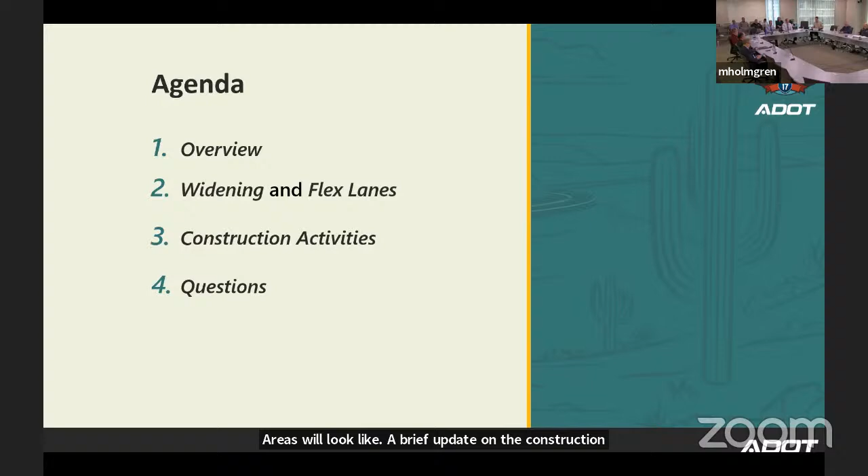So under our contracting method, this project is a design, build, operate, and maintain. We actually do have an operate and maintain component of this project. So when the construction is finished, the developer team will be operating and maintaining the flex lanes for a period of 3 years, which will give us time for training our staff on the new technology we'll be using on these flex lanes.

As far as the project owner, that will be us as ADOT. Working with us is our general engineering consultant firm, HDR, who is providing all of our construction oversight and inspection. The developer team selected for this project was the Kiewit-Fann joint venture, along with various local subconsultants and firms.

Size of this project is 23 miles, starting at Anthem Way up to the Sunset Point Rest Area. Included in that are 2 different segments: 15 miles at the southern end, from Anthem to Coldwater up at Black Canyon City, is widening with general purpose lanes, 1 new lane in each direction. The 8 miles of flex lanes will be on southbound I-17 from Sunset Point down to Black Canyon City, including 10 bridge widenings, 2 bridge replacements, and we also added 1 deck replacement on the Bumblebee northbound bridge to this contract.

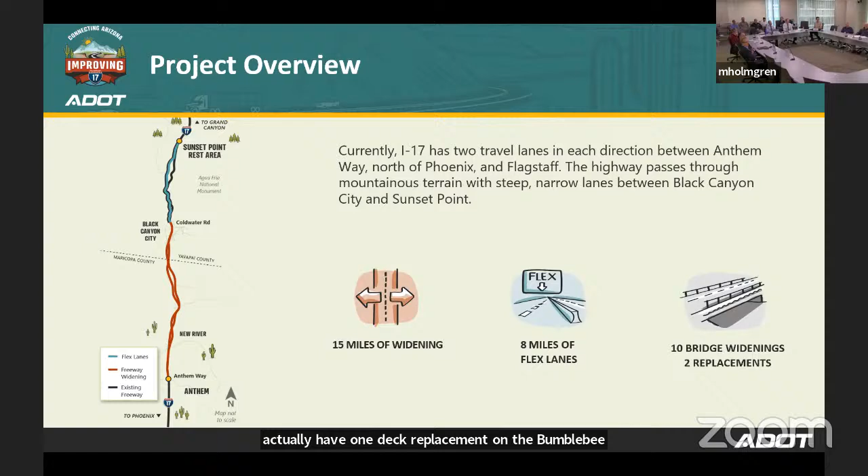Some of the benefits we're looking for: enhanced safety, of course. Everybody knows that segment between Black Canyon City and Sunset Point, especially on the northbound side on a Friday afternoon, is extremely congested with trucks going up that 6% grade. Added capacity for the future, improved traffic flow, and also supporting economic growth, because this is one of our key commerce corridors in the state.

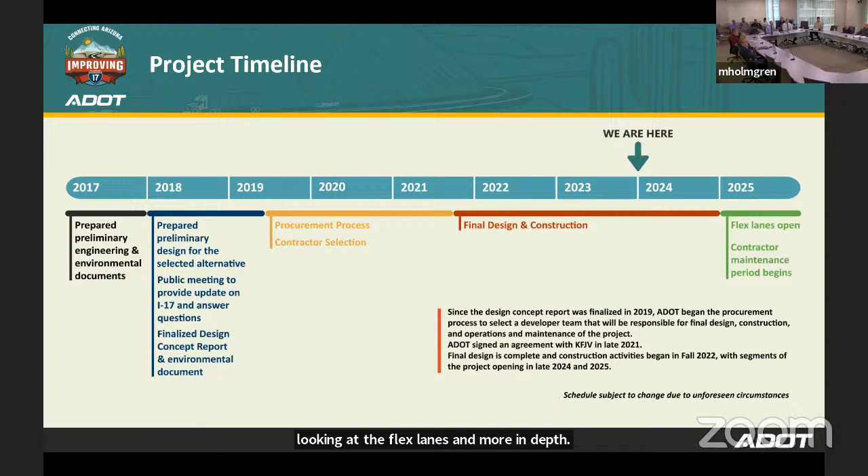Project timeline, and this one's a little condensed, because 2017 was the revised DCR after we completed the first DCR in 2015, and then came back and did a modified DCR looking at the flex lanes and more in depth on the components we were going to put into this project.

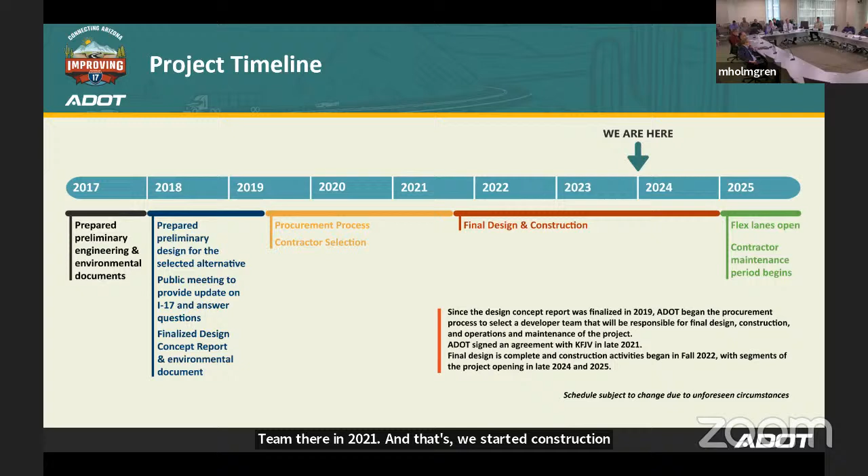So our project timeline actually started more in 2009 when we started this DCR process, and then finally to the procurement of the developer team starting in 2019. That got extended because of COVID, and then finally we were able to select our team in 2021. We started construction in 2022, a 3-year contract basically, and now we're right there at 2024, hopefully finishing up here in 2025 with this project.

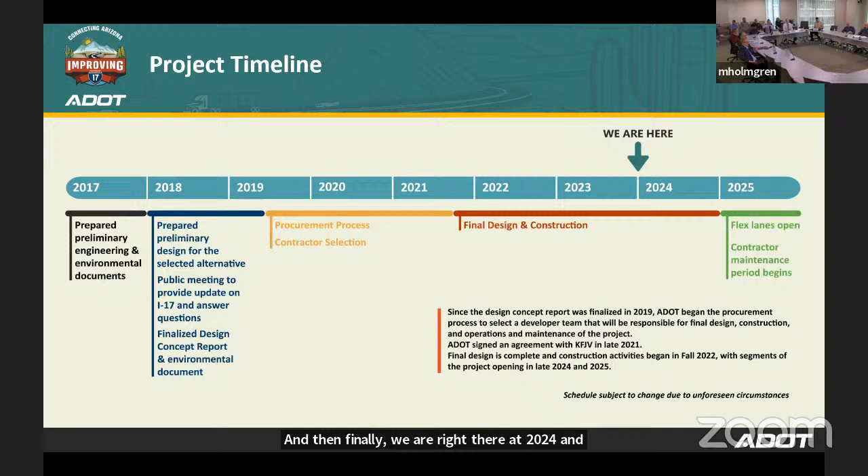So the widening between Anthem and Black Canyon City: that general purpose lane, depending on which segment we're in, may be done on the median side or the outside. Since this is a developer-driven design, they get to choose the design and how they want to proceed, balancing earthwork and other things. When it's opened up, you won't know which side we've completed on - you can tell right now going through the corridor just because of where we're making the cuts, but that will be a seamless transition once it's all final paved out.

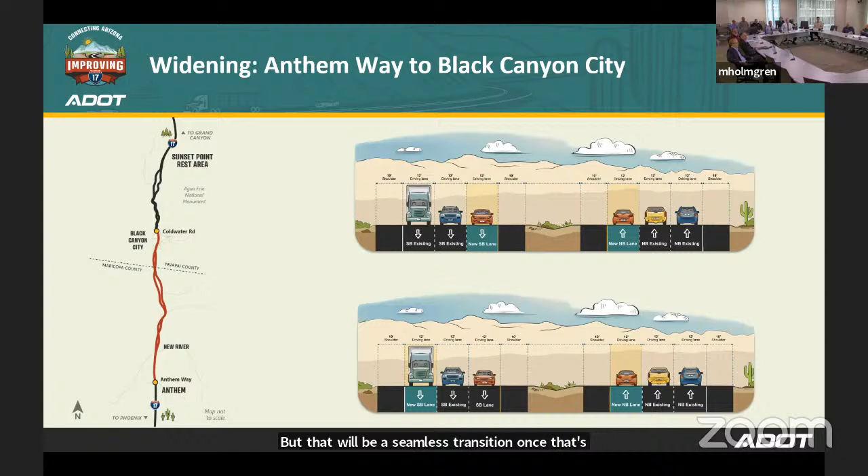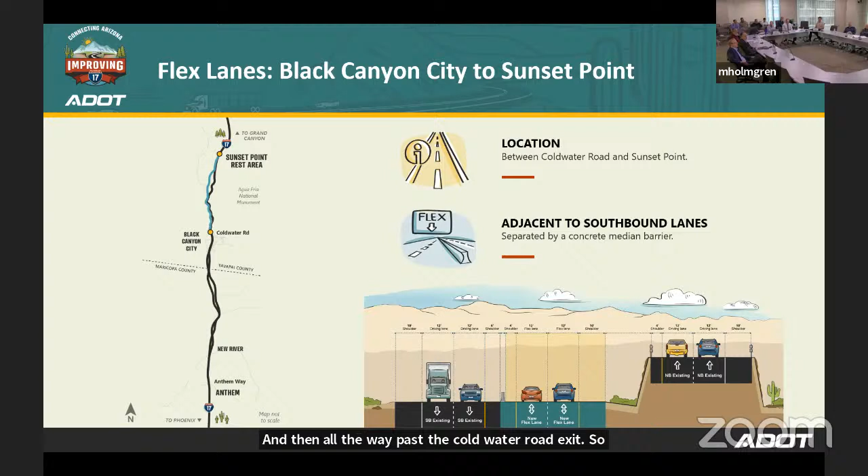As far as the flex lanes, like I said before, they are on the southbound side. We're leaving the northbound side up that hill alone for right now. Those lanes will be separated from the southbound by a concrete barrier, so these will not be just contiguous lanes where you can get in and out of them. There are no exits on those flex lanes. Once you get on them at the bottom of the hill at Black Canyon City, you will not be able to get off until you tie back in at the top of the hill at Sunset Point. Same thing coming southbound: you get on them at Sunset Point Rest Area, and then all the way past the Coldwater Road exit. So there will be no exits at Bumblebee, Coldwater, or Sunset Point for these flex lanes.

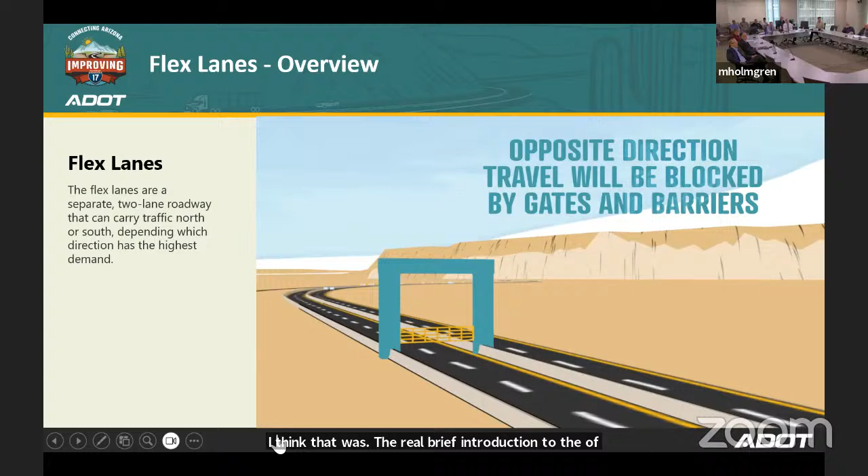I think that was the real brief introduction to how those will operate. Let's go into the crossover now.

To go into a little more detail about what those components will look like on the crossover entrances, you can see in the bottom right that photo of it. They will be a dual lane entrance into those flex lanes, two lanes with a left exit to get into them.

Up on the upper left, those will be the gates, the swing gates that will either close them off or open as the flex lanes dictate. As you approach, they progressively get longer. The first gate will be short, only over the shoulder, and they progressively get longer as they're closing, so that traffic can see them closing, and if someone shouldn't be there, they can get out of the way without hitting those gates. They also have LED flashing arrows when in operation.

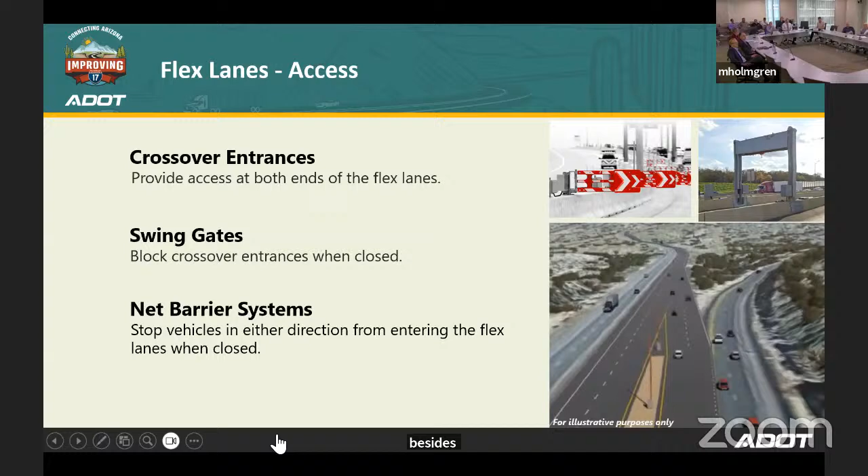That upper right picture is the net barrier, the vehicle arresting barrier. You can barely see it in the open position there. There's an actual net up at the top that drops down when closed. If anybody wrong-way gets into it, the vehicle arresting barrier will stop them. I don't believe it will fully stop a semi, but it will make a lot of noise and be very evident that you should not be in there, besides the multiple gates they'll go through before they even get to that arresting barrier.

As far as what those crossovers will look like as you're approaching, this is up at Sunset Point as you're coming southbound. There are a series of hybrid guide signs that actually have a dynamic message on them for open or close. You can see they look like our generic exit signs, but there's an actual message sign in there for open or closed.

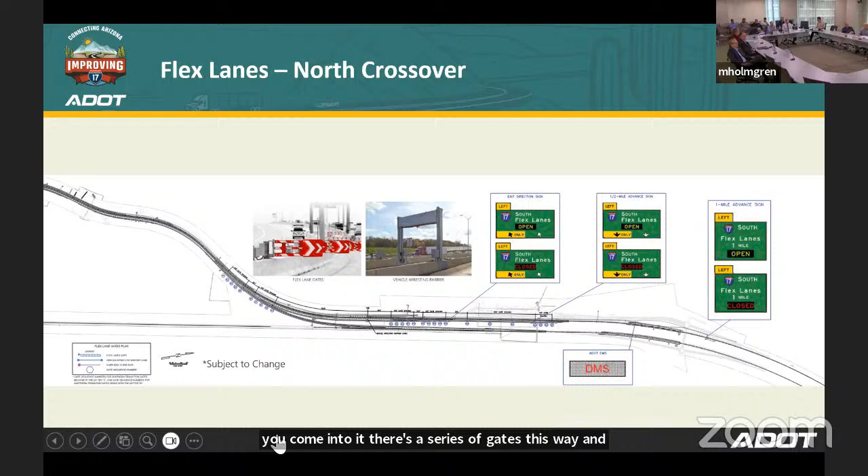Depending on which way we're using the flex lanes, you'll have the one mile, half mile, and exit guide signs with the appropriate directional messages. You can also see this shows where the vehicle barrier will be right there. As you come into it, there's a series of gates this way, and for the opposite direction, for wrong-way traffic, there's also a series of gates for when it's closed.

So for the operations of the flex lanes, how are we going to operate these? Under normal operations, they'll be open to northbound traffic basically Monday through Saturday, full time. Then we'll decide, looking at traffic volumes, when on Saturday night to flip those lanes over and open them up to southbound for Sunday afternoon especially.

For holiday operations, we'll open those as dictated by the different holidays coming up. For incident operations, if we have an accident, especially on the northbound side in the hill, we can push everybody over onto the flex lanes while dealing with that accident, or on the southbound side if there's an accident in the general purpose lanes. So as the name suggests, these will have very flexible use as to how we operate the directional flow on these lanes.

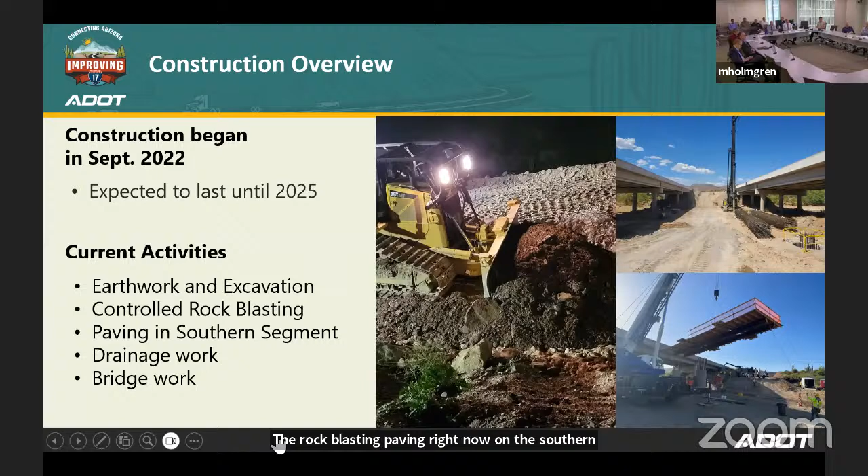Construction started in earnest in September of 2022, and as I said, it's expected to go till 2025 for full flex lane operation. Current activities we're still working on include earthwork, excavation, rock blasting, and paving right now on the southern segment. If anybody's been up there, they've noticed a lot of paving going on in recent months. We're still working on drainage and bridge work as well.

As far as blasting operations, the biggest portion of that is on the southbound flex lane portion right now. You can see the mountain of aggregate we have at the top of the hill there at Sunset Point. Almost all of the aggregate being used on this job is actually being produced from this project, from the materials we're getting off it. Our paving operation is actually stationed at Table Mesa Road on the east side, upstream there.

Right now, there were a total of 70 rock blasts anticipated, and we've completed about 59 of those to date, so we're getting close to the end of our rock blasting on the project. To date, about 186,000 yards of rock have been blasted on this project. That doesn't include the rock we were able to rip using conventional equipment, so there was a lot of that too, but this is just the amount we actually had to blast.

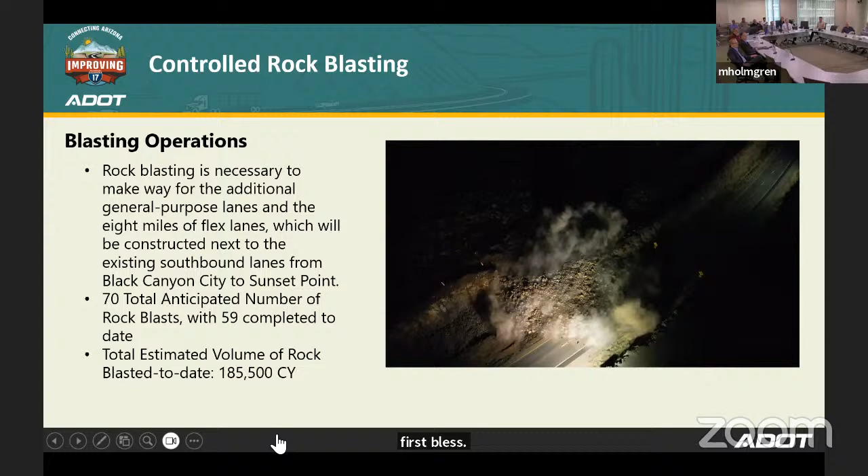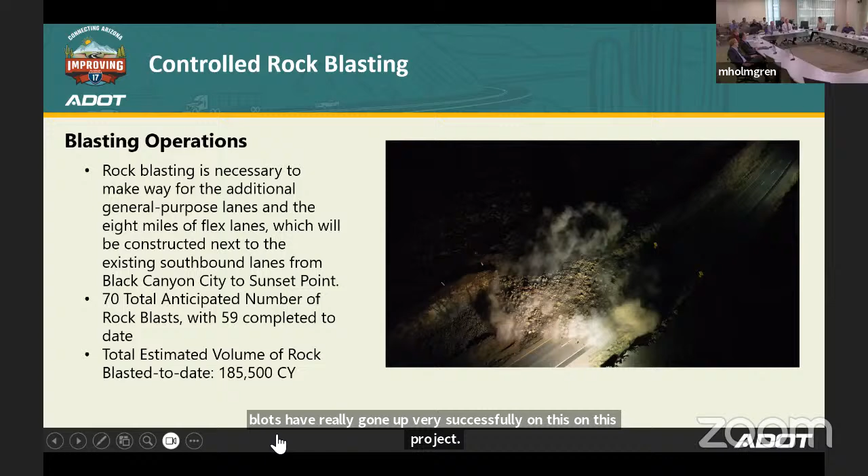That's a little video of what that blast looked like. That was one of our first blasts. It just kind of moved the dirt and the rock a little bit, but actually almost all of our blasts have gone up very successfully on this project. We have not had any incidents. I'm going to keep knocking on wood that we continue that trend till the end.

Some of the innovative things we had to work through on the project: existing concrete box culverts. Some of these box culverts have been out there 70 years. Not a lot of as-built drawings were available for us, so it was hard to tell whether or not we had enough capacity to do the widening over the ends. But to remove one of those box culverts and build a new one would have been significant disruption to traffic.

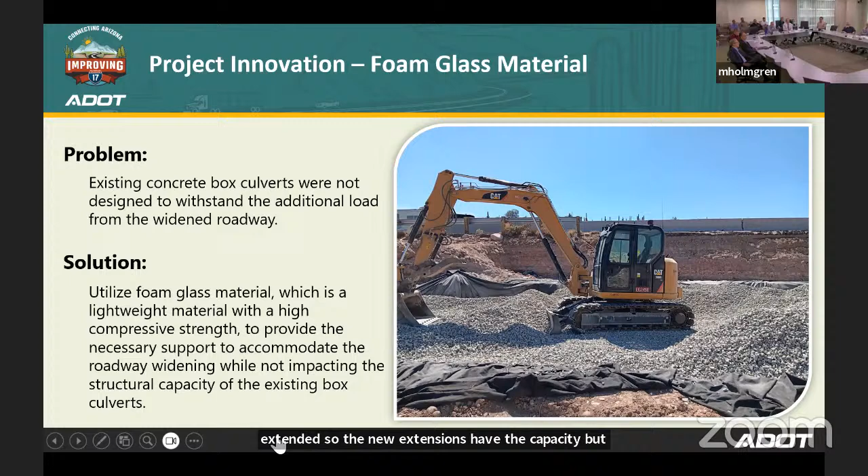What we came up with, and the developer helped us through this process, is actually a lightweight foam glass material. Basically, it's a manufactured pumice with high compressive strength that doesn't compact a lot. What it allowed us to do was not exceed the loading capacity of the box culverts and still put the widening of the lanes across them. Those box culverts were also extended, so the new extensions have the capacity, but not knowing what the old capacity of the structure was, this was a solution to not exceed the loading capacity on our box culverts.

Paving is another innovation we're using on this project. The thickness of the AC is not consistent throughout the project. Depending on where we are and what our subgrade values look like, our AC thickness actually varies. The thinnest we allowed was 5 inches of AC, and then up to whatever the modulus requires after that. Right now they're paving in the southern segment, and hopefully we'll keep on track and be able to open up those third general purpose lanes towards the end of this year, up to Black Canyon City.

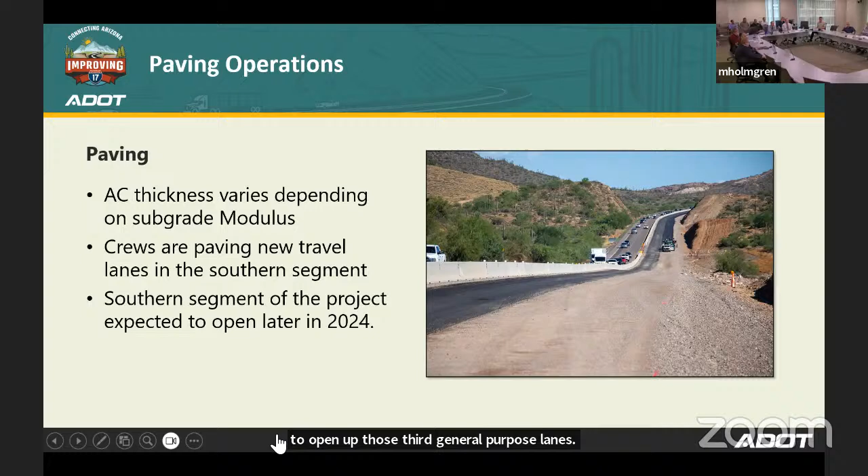Some of the current stats from the project as of about December: about 1.8 million yards of embankment, and we've moved about 1 million yards as of December. Equating that to a truck haul, almost 65,000 truckloads of material have been moved to date. Of the 395,000 tons of asphalt, about 75,000 have been placed to date. The final friction course layer, the half-inch lift of 47,000 tons, we should be starting this spring.

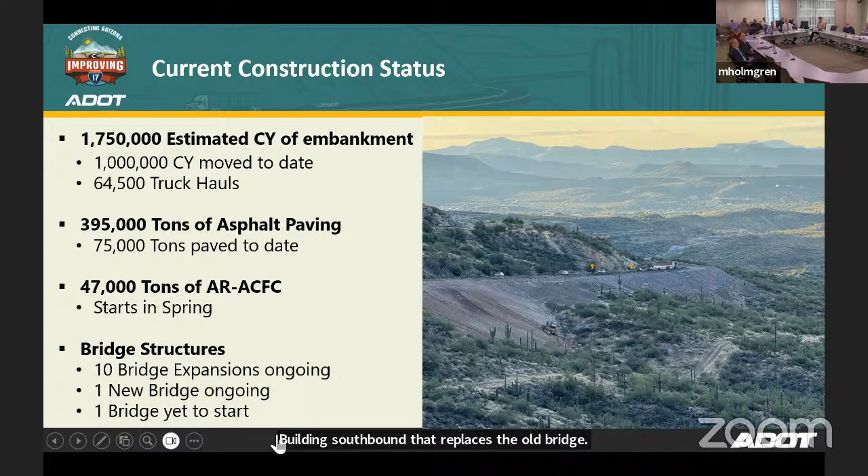And then 10 of our bridge expansions are ongoing. The Moores Gulch is the one new bridge we're building southbound that replaces the old bridge. And then the one bridge we have yet to start is the Bumblebee southbound TI bridge, that gets actually relocated.

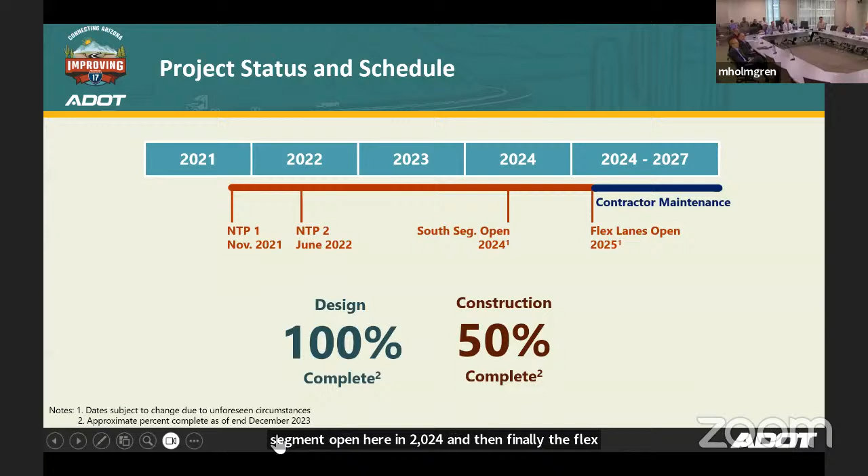As far as some of the things we put in place to help deal with construction traffic: our southbound lane closures are 7 p.m. to 6 a.m. Monday through Saturday, to avoid Sunday night southbound traffic coming from Flagstaff. For the northbound side, it's 7 p.m. to 6 a.m., also Sunday night through Friday morning. Nothing happens during weekends or holidays — that was something we wrote into the contract. Realistically, looking at how it's been going so far, a lot of people from the northern area I've talked to have said that as big of a project as it is, they've been pleasantly surprised about how unrestricted it has actually been. We're going to keep our fingers crossed that continues through the rest of the job as well.

Primary takeaways for everybody: yes, we are improving I-17 north of Phoenix, and we are open through construction through the weekends and holidays, with really only weeknight lane closures. Some other things we put into the contract: the contractor can only do a 1 hour full closure on the project, and has to get traffic moving within an hour after the closure. Some people have gotten caught in those closures at night, but that's really the only way we can safely do those rock blasts.

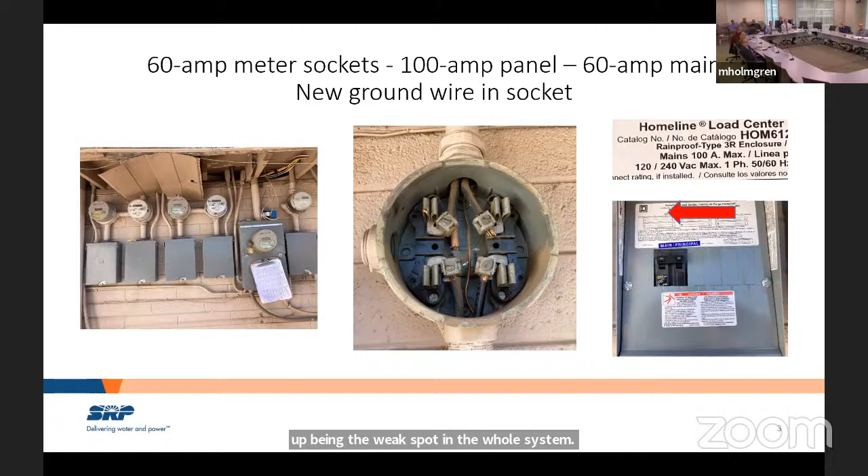Other access issues we come across - this is more of an extreme one, I think, where you can see from the big picture it's just a big billboard and they put a brick wall right around all the service equipment. I don't even believe there's a door on this at that time. Unfortunately, these are just some pictures I happen to have collected over the years. I'm sure this has been resolved since then, but this is again an example of access issues we come across when we show up and discover a situation that seems rather unreasonable, that the city would also be interested in seeing and inspecting.

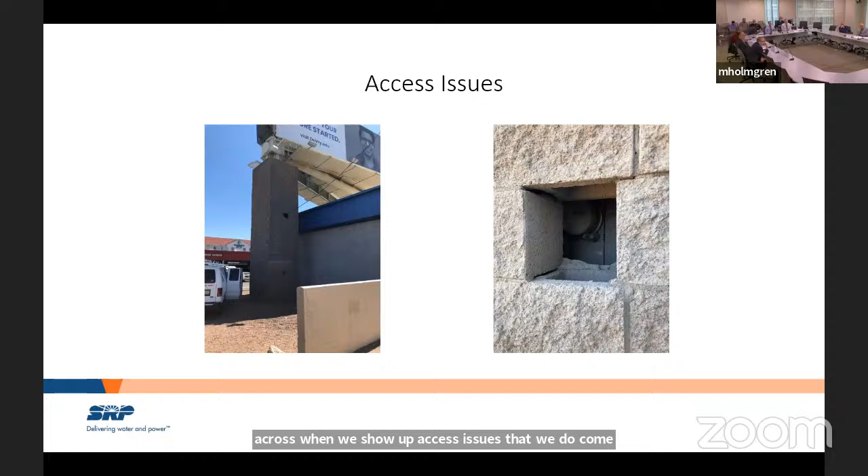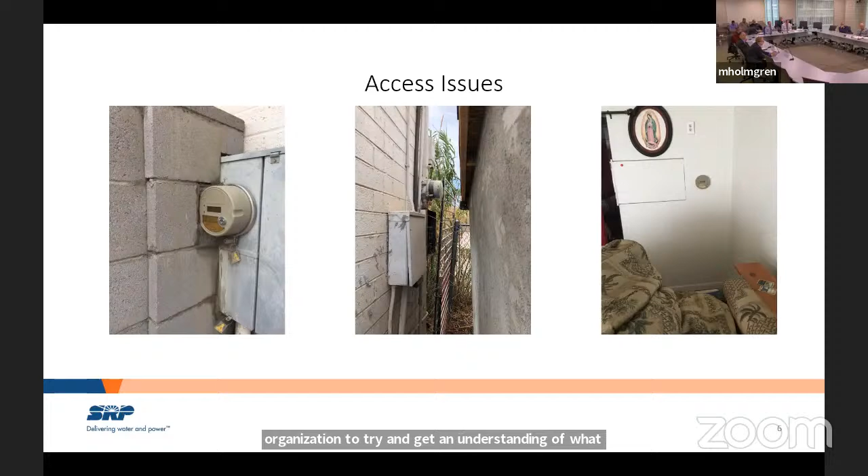The one on the right, I think you can tell that's in somebody's bedroom now. They built a room around the back of the house and actually drywalled over the top of all their service equipment. Some of the things we see are just surprising - we'll leave it at that. But that's in somebody's bedroom now. That's probably one of the more serious and difficult situations to address, but really just coming to this organization to try and get an understanding of what can be done for some of these situations, if not now, when and how.

And that's all I have, as far as examples to provide. But again, just to summarize, the whole point of this is just to establish a relationship with the committee.

Sharon had said that the AHJs on the committee would be interested in trying to address some of these. Some of them are going to be easier than others, and some are going to be a significant challenge to address. I know on some of the more severe examples, it would become a financial burden to come in and try to make immediate corrections on people.

Some of these have been done by people that lived there before they got there. So to punish and penalize them for something they're unaware of regarding code restrictions just complicates the whole matter. So if we can just reestablish some kind of relationship and make some progress on addressing these issues.

I don't know if it's better for the individual AHJs to reach out to you individually or to come through this committee. From previous communications with Sharon, she had indicated that this would be a good avenue for us to address.